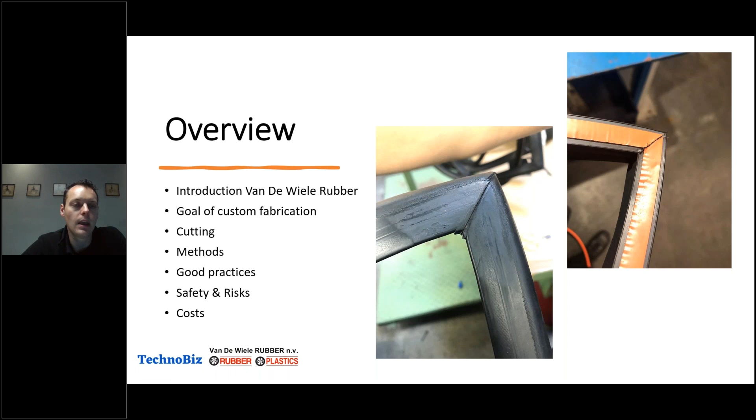First, a small introduction about the company Van de Wiele Rubber. We are located in Belgium. We are a rubber manufacturing and plastic company, so we are a transforming business. We buy the raw materials, we source the raw materials, we compound it ourselves, and then we do multiple processing windows. So we have extrusion lines, we can do injection molded parts, and we can do a variety of operations to deliver a client-specific solution to the customer.

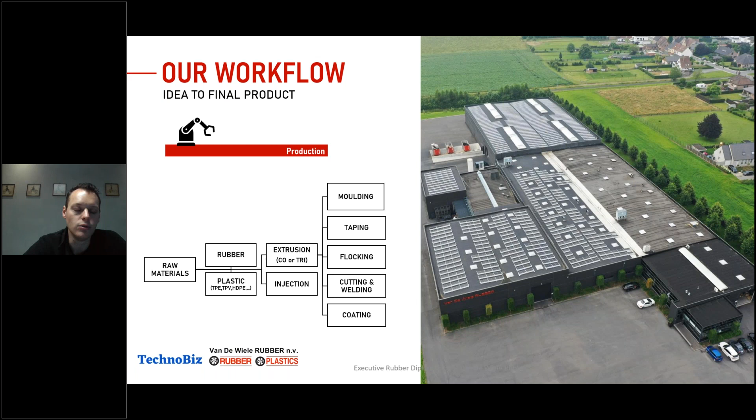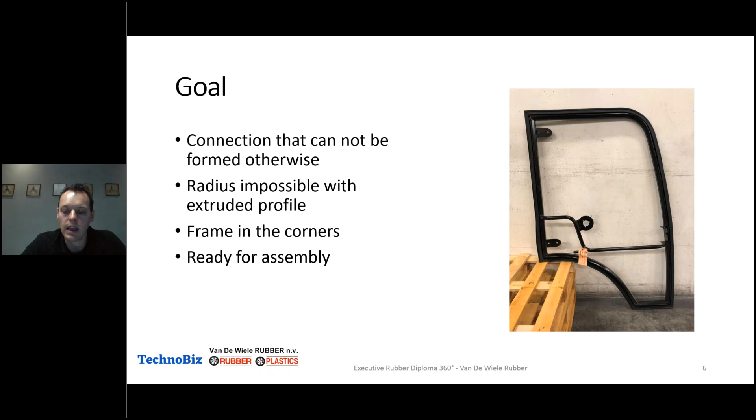So when we get a new project or start a collaboration with a partner to develop a good sealing solution for their new project, one of the best ways to start is to let the cabin come to us, and then we can immediately make samples and prototypes and test it ourselves before we send the cabin back to them, and they can also do their validation tests.

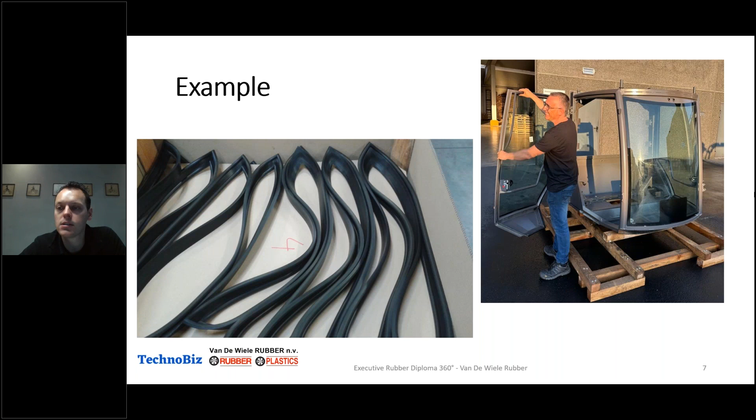For this cabin, there were some particular challenges because there was a very specific corner that was very difficult to make, but we are in the process of validating this profile further and making some modifications to get the good sealing performance.

One of the most important aspects in this custom fabrication is the cutting on length, because we extrude the co-extrusion profiles on our co-extrusion line we have here in-house. So we have full control on all the profile quality for dimensions, for specifications on compound, on mechanical testing results like compression, insertion, clamping forces.

But the cutting on length is very important. This is a custom action that we need to do because the cabin doors have a specific dimension and we have to fit the frame and the assembly correctly to the design of the cabin. Also, the angles are very important to consider the right dimension so that the sealing gasket has a good fit on the cabin.

Here on the image, you see an example of a splicing corner. This is a sealing profile which has adhesive tape and a bulb. You see the compression bulb on top. This is for when you close the door.

So the fitting of the parts is very important, but when discussing with the customer or the clients, it's very important to have clear agreements, especially for the measurements. The measurement of the length is one of the most critical parts in this type of business because it is easy to get confused and you have to make very clear drawings and practical testing,

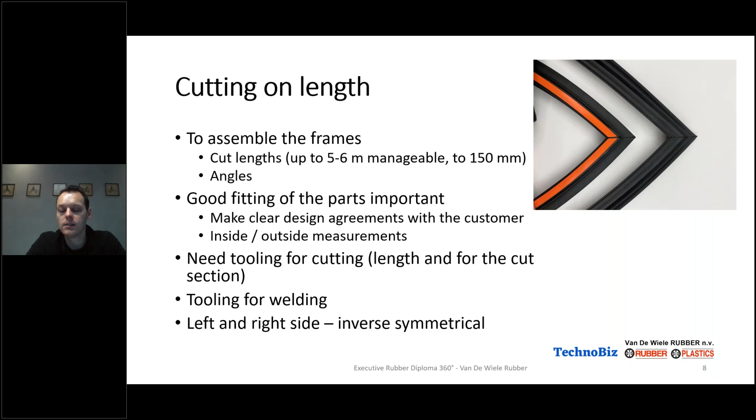And also for the article code and numbering, it is very important to have a clear communication on which side you are making, because you would think you make equal parts for the left and right side, but that is not the case. So when an order comes in for only one side, you need to make sure you are able to produce the correct one.

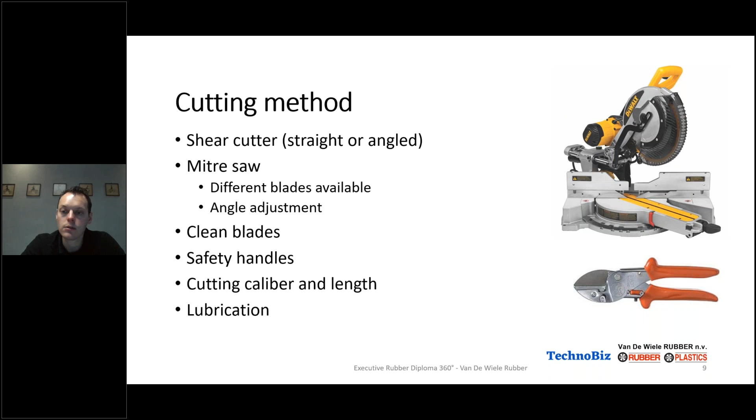When we need to do prototyping or special testing or something, it's mostly done with a special cutting scissor that is working very well for the rubber. So this is a standard model, but there exist models where you can also adjust the angle, and you have a longer knife, so you can cut also a bigger profile.

Now we are going to discuss the splicing methods. So there are 4 methods we consider as an option when we need to deliver a custom fabricated sealing gasket. So we have the hot splicing method. There is a cold splicing method. The difference between these two will become clear in the next slide. Then you have cold bonding, which is also seen as a gluing method, and corner injection molding.

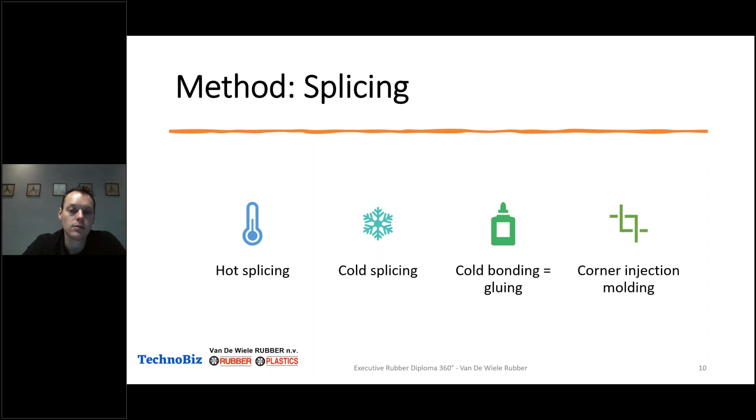Each of these methods has its own advantages, and sometimes the choice for a project depends on the profile specifications and the possibilities to make a choice for one of these methods. Firstly, we are going to discuss the hot splicing method, which is one of the most used. So in fact, you start from the rubber profile. Mostly in our cases, these are EPDM co-extruded rubber profiles, because the profiles need to have the ozone and water resistance and the sealing performance of dynamic applications when you're installing cabin doors.

So this is a typical machine. What is the principle? The principle is that it is working with hot molds. The molds are at a temperature of 180 degrees, and you are also using a piece of uncured rubber film. Normally that is inserted with the roll on the top. The profiles are already cured, so they are coming from the vulcanization line. This is an example of the mold, so you can easily insert it through one side. On the other side, you have an identical pair, and you can also make multiple cavities, so you can increase your output for the cycle time.

So these molds are heated, and then you put a piece of uncured film together, you mount the profiles, and then you close the machine. The machine will then use pressure, heat, and time to vulcanize these two parts together for a certain amount of time, and then you will have a good connection between the two profile ends and the piece of uncured film that you have put together.

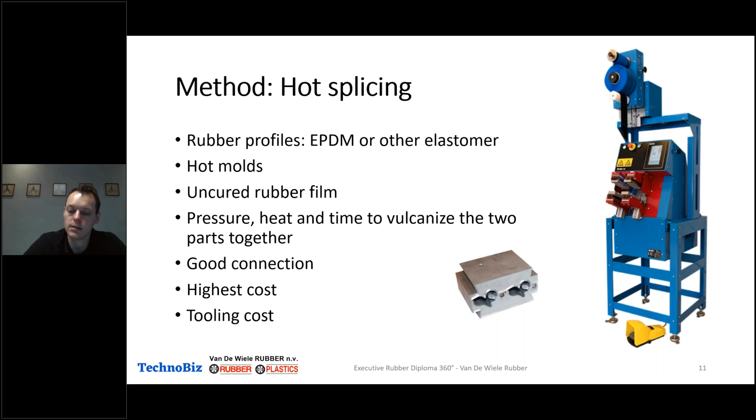Then another method is the cold splicing method. The difference here is that the molds that you saw in the previous slides are cold in this situation, and you are not using an EPDM uncured rubber film. Mostly it is a thermoplastic film, a PE welding foil that is specially formulated for these types of applications. Why is this method sometimes preferred? This is for profiles which have adhesive tape. The adhesive tape you saw in the beginning of the slides, the orange liner, cannot withstand the temperature of 180 degrees of the hot splicing method. So then you need the cold option.

So the principle is the same. You mount the profiles in the two links with the cavities, but then they will be heated for a short time, mostly by means of infrared lights. Only the ends will be heated very briefly, and the PE foil as well, because it will melt, and then the molds will close for a certain time, but not as long compared to the vulcanization of the hot splicing, and you will have a good connection. Also here you have a tooling cost for the molding application.

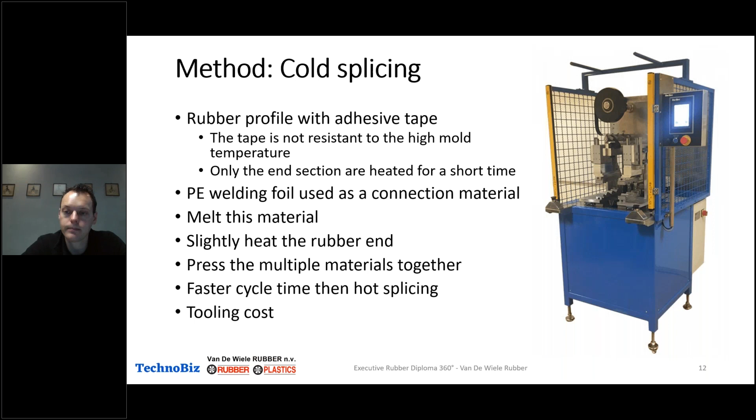Then the third method is the cold bonding or the gluing. This is the most labor intensive process. It is good for prototyping and short volumes of very specific one-time projects where the investment in all the tooling costs is not efficient. The type of glue that is used for adhesive rubber is the cyanoacrylate glues. They make a very good connection and they have a fast reaction time with rubber. But this is also mostly used for touching up the earlier methods when there is a small defect.

But we are working from the principle that you need to design your process, the profiles and the toolings so that you receive a good weld at the end, which does not require glue. So glue is not the standard solution to make a good connection. The advantage of this is that you don't need tooling costs, but it is a labor intensive process to work with. Also, you're working with small amounts of glue in droplets, so you have to pay attention.

The operators have to pay attention when they are working with this type of glue, so that their skin is protected, and also the glue has the tendency to dry out quickly, but you have to pay attention that you don't get droplets, especially in the eyes, because that is very harmful.

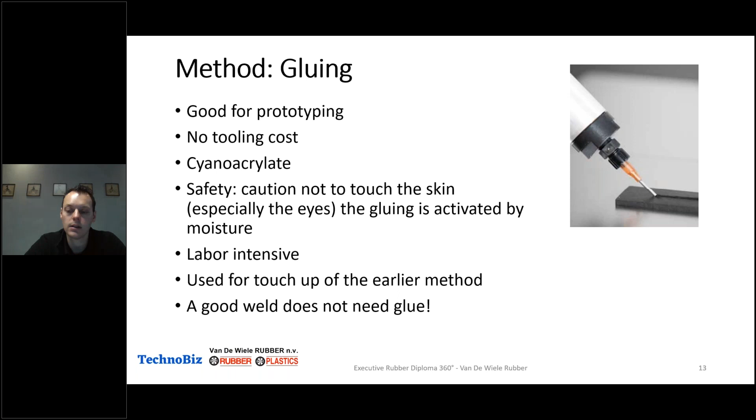Then the last method is the corner molding. So this is a more difficult and complicated process. Then you are able to make special shapes and corners. This is most occurring in the automotive industry, for glass encapsulation, for example, but also to make a connection between two seals in a difficult spot.

What is special about this technique is, you are inserting again the profiles in the tooling mold, in a specially designed mold, and then you are going to inject a special compound, mostly a special TPE compound, which is able to bond well to EPDM and which is quite soft, because mostly it is a solid corner that you are getting, and this can lead to pressure increases in the corners when the installation of the gasket is taking place.

But this offers some very nice options that you can use. You can use it to make very special shapes. The connection can be bigger than a few millimeters, so you can make a special corner or a special transition from one profile, so it doesn't need to be exactly the same shape, or you can twist it, or you can orient it differently with this type of method.

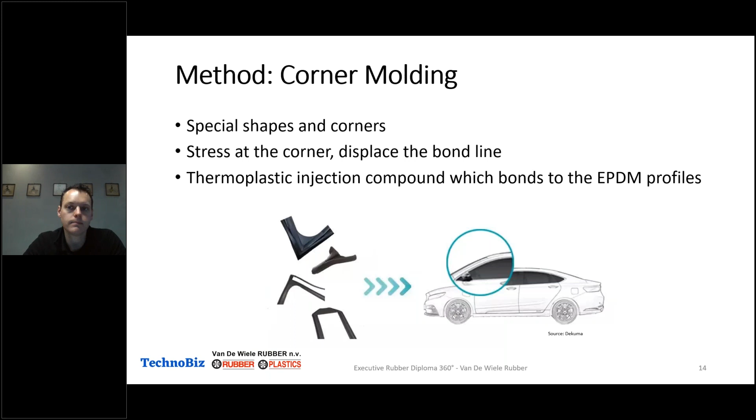So these are the methods to discuss when you are talking about making the connection between two profiles that were sawed to length or cut at a specific angle. But for custom fabrication, there exist also some other options. So mostly, if the corners need some reinforcement or some additional requirement, it is possible to insert a type of tubetto.

So you see here, this is a co-extruded profile with a compact and cellular section, but there was a separate cellular extruded tube piece inserted in this profile. This is to offer extra stability in the corner to prevent collapsing. But you need to make sure the stress will not be too much, because they still need to be able to close the door effectively.

When this is placed at the ends of the connection, they will also be welded together, so they will not move. But sometimes there is a specific spot along the length of the profile where there is a requirement for this type of tubetto, and then you need a fastener system, and this is done with a buttoneer system. So you're in fact adding a little button, which is a plastic material, and you insert it with a sort of gun with a needle through the profile, and when it's done nicely, you almost don't see it. So it's very smoothly inserted on the profiles, and this way the tubettos remain in position without any problem.

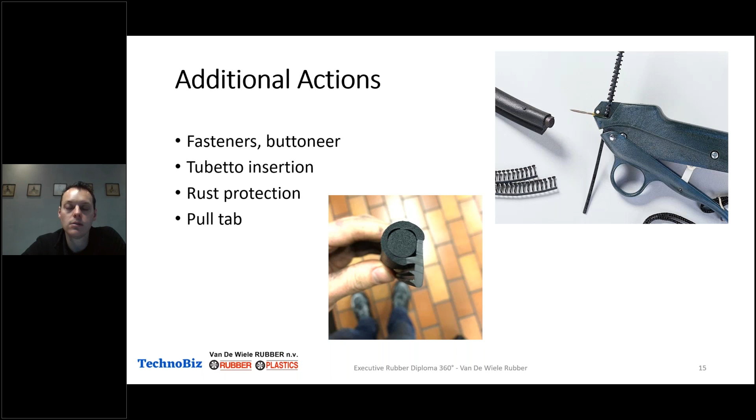So like I said, when you have an open end with the bulb, there need to be no holes in the profile because the air can escape. But when you are working with a closed system in the co-extrusion of the profile production, you need to add drilled holes to allow the air to escape smoothly when they are closing the door. Otherwise, the client will have problems when they are trying to close the door, that it is not going as smoothly as they want.

In the following slides, I would like to share some good working practices, because it is quite a labor-intensive process. It's all manual, and there come a lot of different aspects into play to make a good end product. So here I'm going over some good working practices.

When you're working with setting up a sealing gasket, it exists out of multiple lengths and angles. So when you are preparing your welding production, all the parts are cut and measured beforehand, but you need to make sure you do not mix them up together. This is a problem that could occur. You need to make sure every product you have cut is identified and placed on a specific location, so that when the operator starts welding the gasket, they cannot make an error when making the frame, because otherwise it will not fit in the end.

Another good tip to prevent these mistakes is that every caliber - we use U metal frames to put the profiles inside - these are put with the prototypes to saw on length, and then when it is validated, all the toolings and calibers are marked with the profile identification and their respective length, also with the angle identification, so that all the machines can be adjusted appropriately, so there is no mistake when preparing your parts.

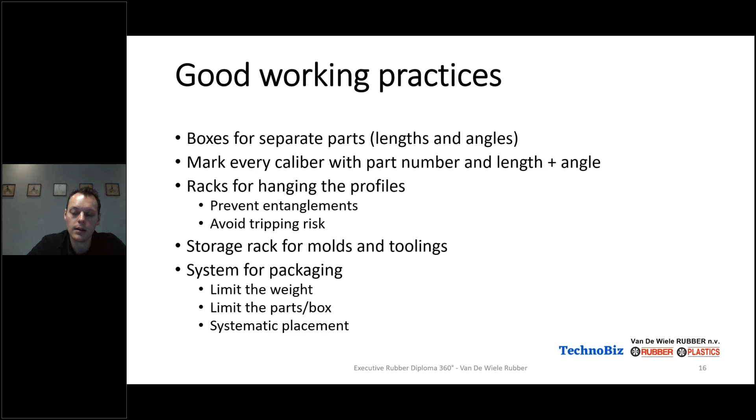So you need to think with the client about how the packaging will occur and how you will effectively place the finished gaskets in the boxes. Also discuss how the customer takes the profiles out of the box, because some customers tend to be quite heavy-handed with the profiles, and then the gaskets tend to be damaged, but with a good system this can be solved.

In this slide, I would like to talk about the cost calculation. When you make a co-extrusion profile, you can do a cost calculation for the extrusion. That is in fact the base starting point for your material input for the custom fabrication process. Then you need to take into account all the following steps to determine a price, so that you can make an offer to your client.

One of the most determining factors for how much work you will have making one sealing gasket is the number of welds in the frame. You can make 3 welds in the frame, or you can have sealing gaskets with 5 welds in the frame. This also determines the number of lengths of profile you need to saw, and thus the cutting action required. Also the differences in length matter - if you need to change from a short to a long length, it takes a different amount of time.

Long lengths take some longer work, but if you need to change a lot, and change the angles all the time, it takes a lot of time to set those up correctly, and every time you need quality control to make sure the production of the length is correct.

There is a variety of tooling costs. You have your extrusion profile and extrusion tooling that you need. But when you want to make a custom fabrication gasket, you also need tooling costs. You need to make length calibers, cutting molds, and welding molds, and those are all not so easy. You need special equipment to do that, and it can get quite costly.

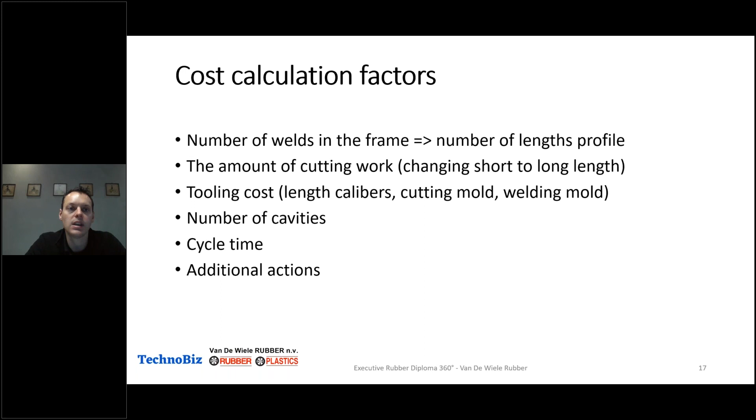In this slide, I'd like to point out some safety risks and hazards that can occur in this environment.

When working with hot molds, you have to pay attention to the heat because you can easily get burned. So you need to use gloves, since the profiles can be hot, also with the cold splicing method when you just take them out of the machine.

Also protect your hands, because the molds have very sharp edges, and you have to work closely to the molds, closing and inserting the profile. Pay attention to the sharp edges so your hands don't get cut up. Of course, also safety shoes and work clothing.

An important aspect is that there is enough lighting foreseen in this work post, because it's very important that operators see what they are doing. The quality level is determined by the details, really the splice level, to make sure there is a good connection with no holes, so you can guarantee the water resistance.

Especially pay attention to your hands when setting up or changing the tooling, especially when exchanging the cutting action with the saw blade. Make sure everything is adjusted so the spinning blade is not going straight into the metal, so always carefully check your setup.

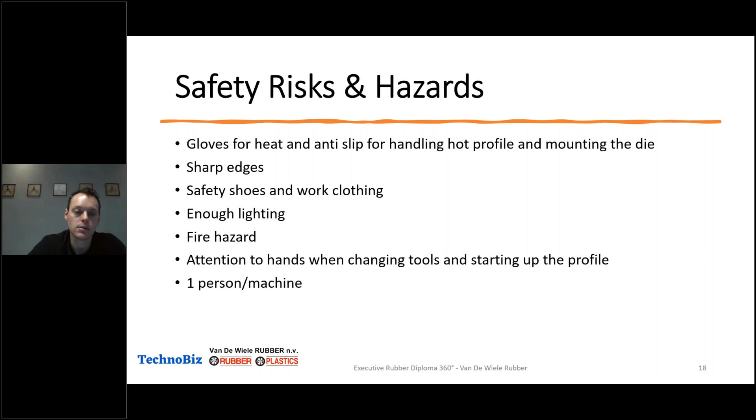In this type of environment, it's important to have one person per machine, because when there is a problem, or when working with multiple persons at one machine, you tend to put your hand somewhere and risk touching the machine while the other person is performing an action. So if you are with multiple persons, make sure you do not interfere with the operator's actions, so you do not get harmed.

Especially with the glue, I would recommend wearing safety goggles, because you do not want to get a droplet of glue in your eyes. To speed up the cycle time necessary for gluing a connection, they tend to blow on this droplet, but you need to make sure you're not blowing the droplet away.

As I told before, the racks foreseen for the system approach also help avoid tripping hazards, so you do not have a cluttered space full of extrusion profiles on the ground. The recommendation is also to handle the profiles with care, so you do not damage the splicings you have made.

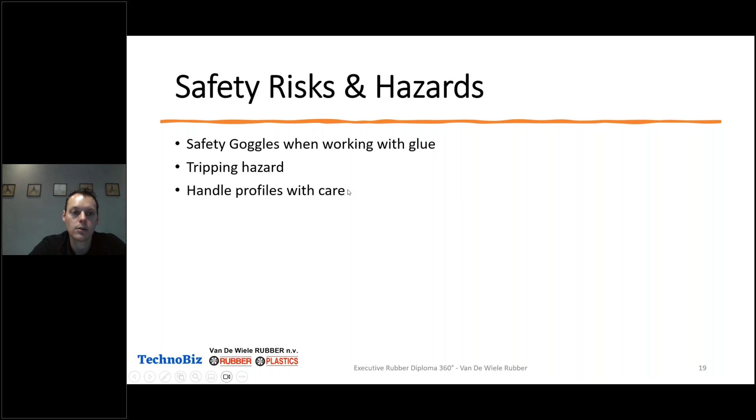I would like to thank you for your attention. I hope it was interesting for you to get some insight into the custom fabrication of co-extruded rubber gaskets. If you have more questions, feel free to contact us, and we will get back to you with the answers. Thank you.